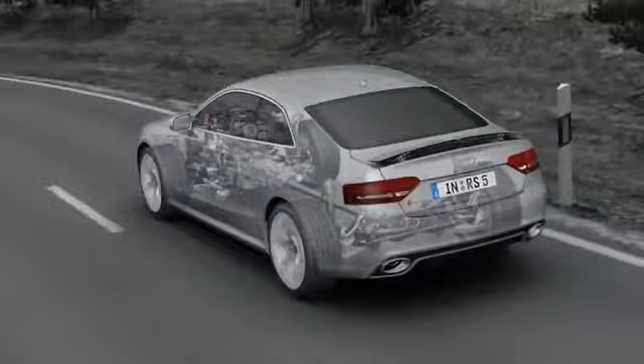The Quattro permanent four-wheel drive system has a long tradition stretching back over 30 years. It permanently and optimally distributes the power from the engine to all four wheels, providing a high level of active safety and reliable traction on practically all surfaces and optimal straight driving. Its permanent safety advantage makes it far superior to other all-wheel drive systems that have to be activated.

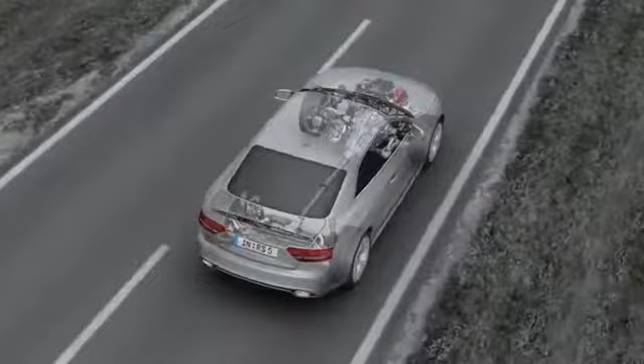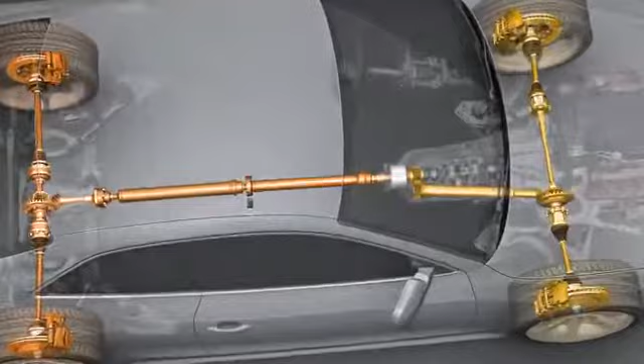The principle is simple. Just as four brakes provide better deceleration, four driven wheels provide better acceleration and greater lateral stability. The new Audi RS5 sees the introduction of the latest generation of Quattro with crown gear center differential and torque vectoring. The task of the center differential is to distribute the drive force of the engine to the front and rear axles.

If, for example, one of the wheels on the front axle starts to spin, the crown gear center differential will immediately spring into action. Up to 85% of the drive force will promptly be fed to the rear axle. This can be seen here with the turning differential gears.

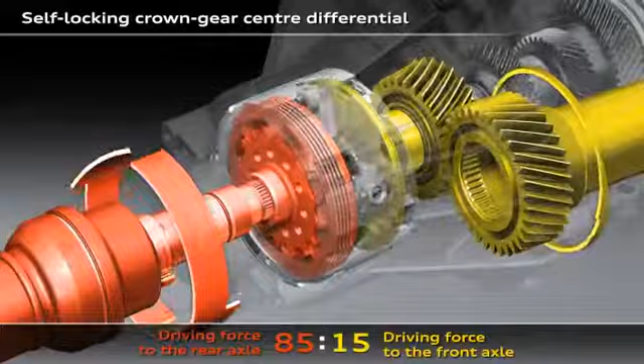If the wheels on the rear axle start to spin, the crown gear center differential will immediately feed up to 70% of the drive force to the front axle.

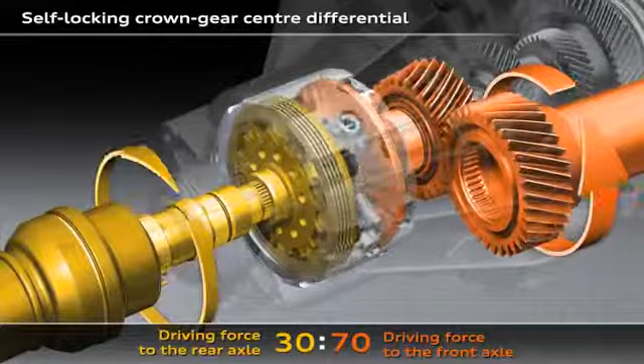In its basic configuration, 60% of the drive torque is fed to the rear axle and 40% to the front axle. Here you can see the structure of the crown gear center differential, the heart of the Quattro drivetrain.

The drive force is introduced via the components illustrated in grey. The gold-coloured parts drive the front axle and the bronze-coloured parts drive the rear axle.

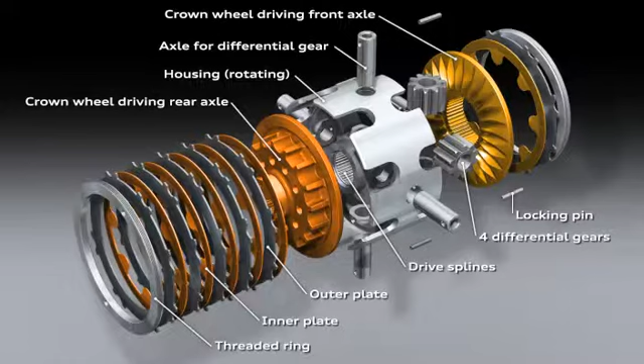If there is a difference in speed between the front and rear axles, the center differential will spring into action and generate a locking torque with the plate packs. That means the drive force will be distributed to the two axles according to actual requirements, allowing more power to be transferred to the wheels.

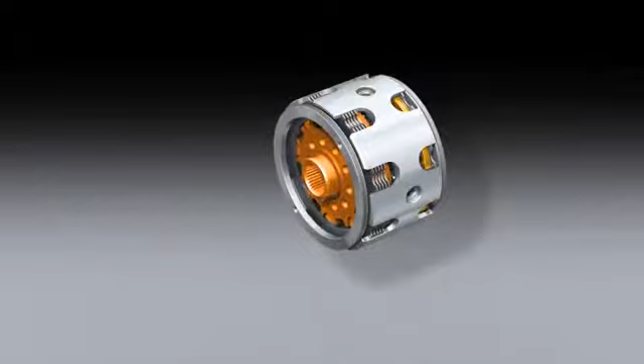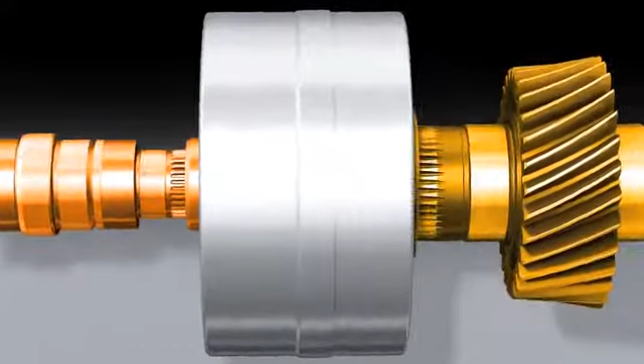The new crown gear employs a metal cap to keep flow losses to a minimum. The basic distribution is generated by gears with different diameters meshing with the two crown gears.

The arrows symbolize the flow of torque or force. For example, if the wheels on one of the drive axles are unable to transmit the full force, the center differential and its differential gears will spring into action. The force will immediately be fed to the axle with the better traction, with zero time lag.

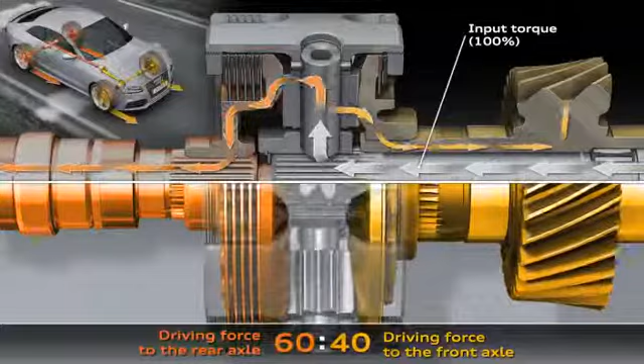Without ESP intervention, this happens with up to 85% to the rear axle and up to 70% to the front axle. With an electronic control system, up to 100% can be fed to a single axle.

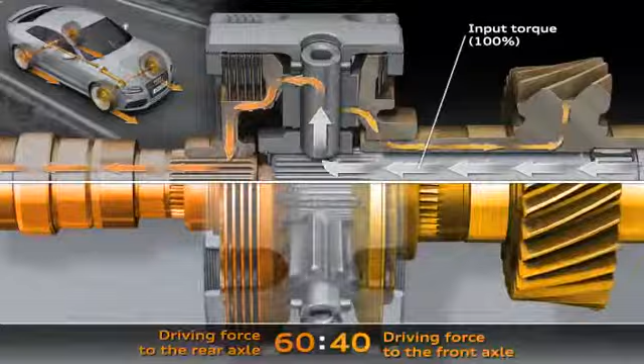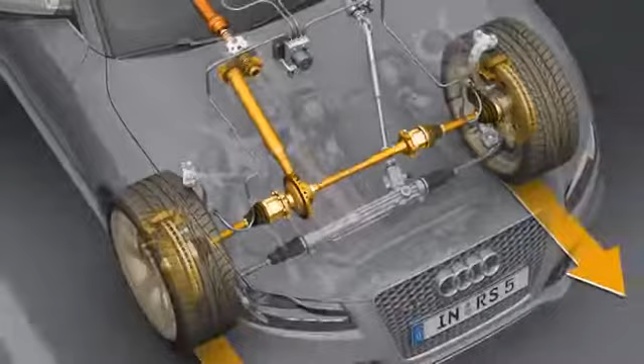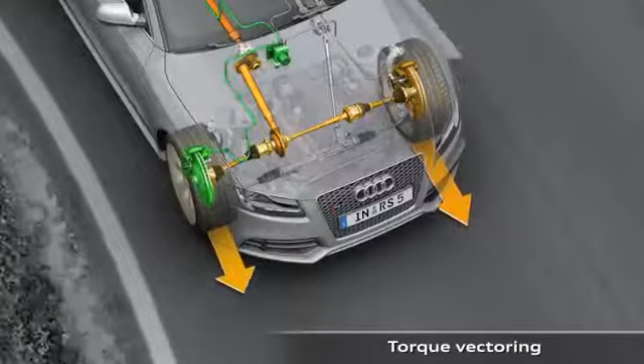The good dynamic performance characteristics of the Audi RS5 with crown gear center differential are noticeably extended in conjunction with torque vectoring. An additional steering torque is generated according to the situation and the driver's needs.

Finely metered braking torque is applied to the two wheels on the inside of the curve. This creates a difference in drive force on the left and right-hand sides.

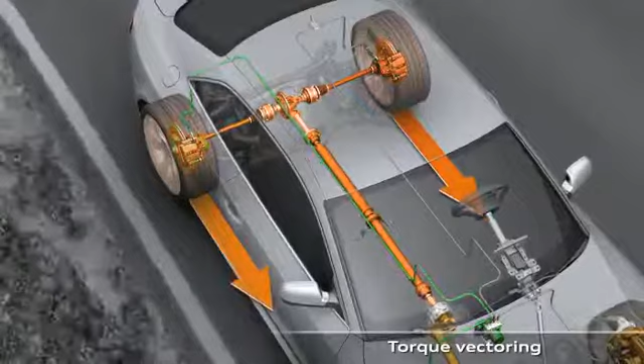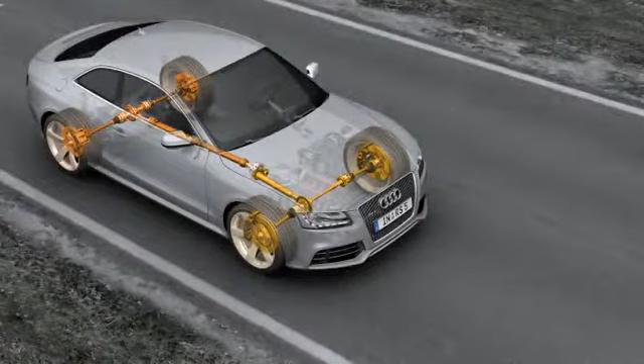At the same time, the longitudinal drive force distribution is optimized according to the driving situation by the ratio of the brake force application on the front and rear axles. When pulling away and when accelerating rapidly, more drive force is fed to the rear axle.

The combination of crown gear center differential and torque vectoring on the Audi RS5 provides for precise handling even when cornering. This happens with zero time lag, in accordance with the driver's steering and acceleration commands. The dynamic drive force distribution allows excellent exploitation of the traction potential, good track stability, and outstanding agility.

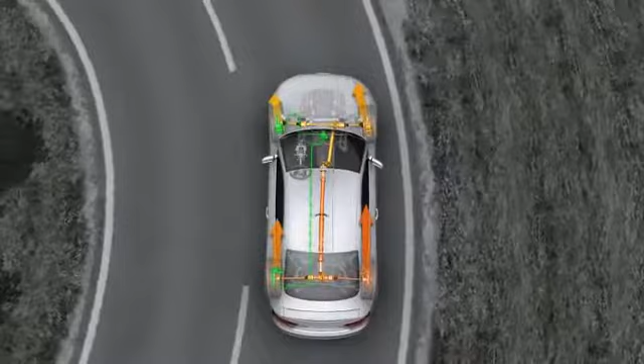The torque vectoring system was developed by Audi to act before the wheels start to spin, reducing undesirable effects. The combination of the Quattro drive system with crown gear differential and torque vectoring gives the Audi RS5 outstandingly precise control right up to the car's handling limits.